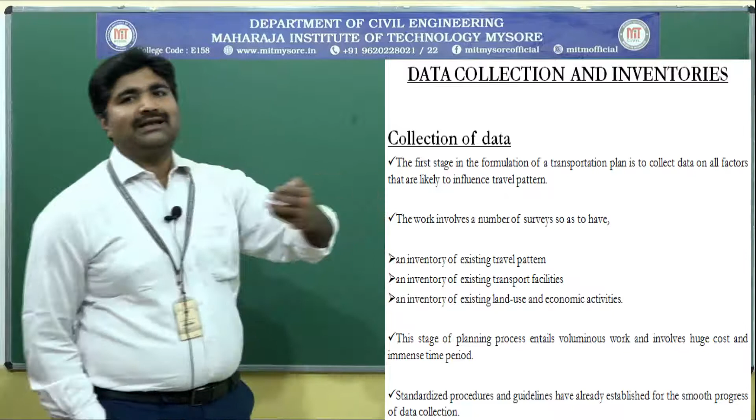What do you mean by data collection? The first stage in the formulation of a transportation plan is to collect data on all the factors likely to influence the travel pattern, the factors which influence movement. The work involves a number of surveys so as to have an existing inventory of existing travel pattern, existing transport facilities, and existing land use and economic activities.

We have to determine the existing travel pattern and movement in the area, whether the purpose of the trip is for work or for school, and what mode they are using, whether personal mode or public transport, and what is the journey time from origin to destination.

When people use private transport, the time taken will be less compared to public transport. We also need data on transport facilities, what facilities exist in the network, whether the road surface is in good condition. If the road surface is not in good condition, the level of service decreases and speed decreases, leading to slow movement of vehicles due to undulations or potholes. We also need to check whether there is a good public transport network.

We need to collect data on what the land use is in that region and what economic activities exist in the study area. Land use may be residential, industrial, commercial, shopping, or recreational. All this data should be collected because it attracts traffic, and depending on this there will be movement and travel pattern.

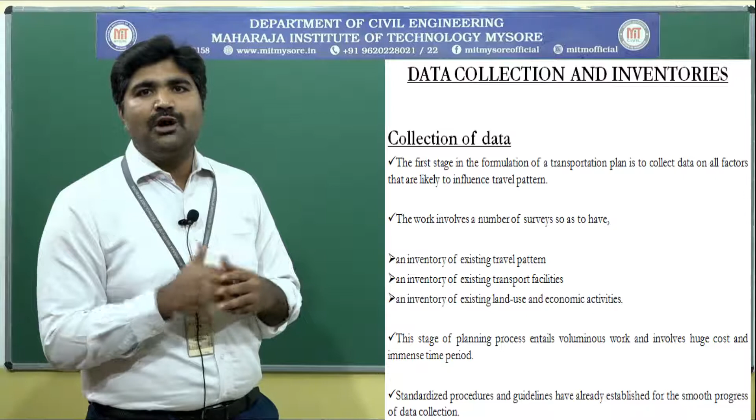Next, organization of surveys and analysis. Before planning, we have to define the study area. To collect all information like travel pattern, land use, economic activities and transport facilities, one needs to know the boundary of the study area or planning area. Hence it is essential to first define the study area.

Transportation planning can be at the national level, regional or state level, or at the urban level, meaning city or town level. For planning at the urban level, the study area should embrace the whole contribution and contain the existing and potential continuous built-up area of the cities, including all areas of the existing built-up area and potential areas.

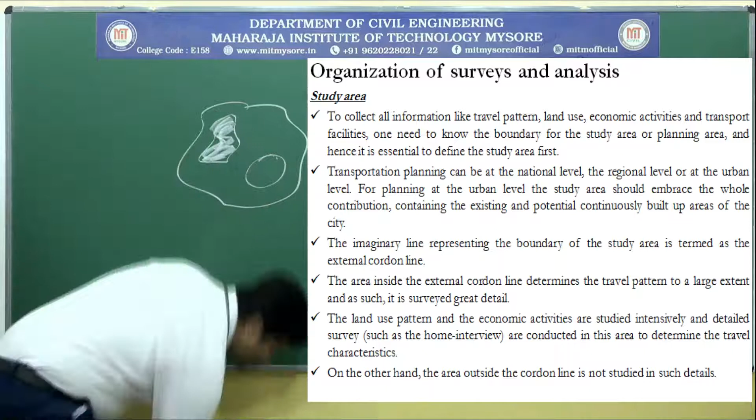Suppose we consider this as the study area, some of this may be developed area and this is vacant space. In future, after providing a good transport network, this vacant area also generates traffic, so we have to consider this area too, since it has potential to generate traffic in future.

This is the study area, bounded by an imaginary line. The imaginary line representing the boundary of the study area is termed the cordon line.

The boundary of the study area is called the cordon line. The area inside the external cordon line determines the travel pattern. I will divide this area into smaller units.

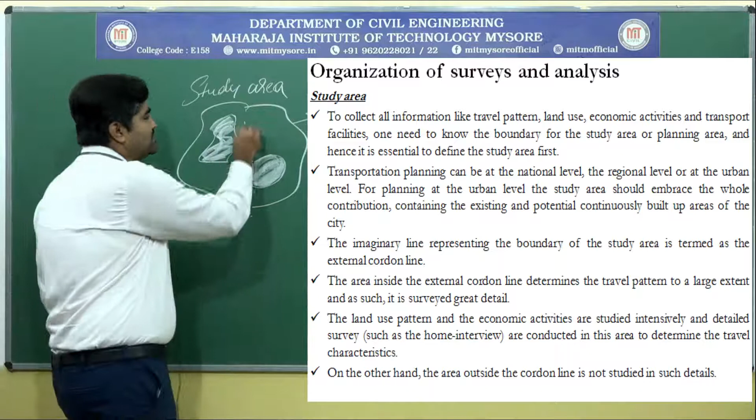These are the next zones. I have divided this study area into zones for the purpose of study.

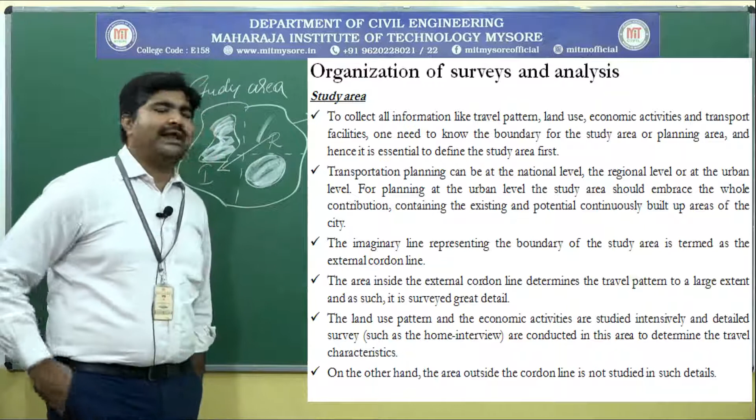Next, the land use pattern and economic activities are studied intensively and detailed surveys are conducted. Detailed surveys are conducted using the home interview survey, to determine the travel pattern and travel characteristics.

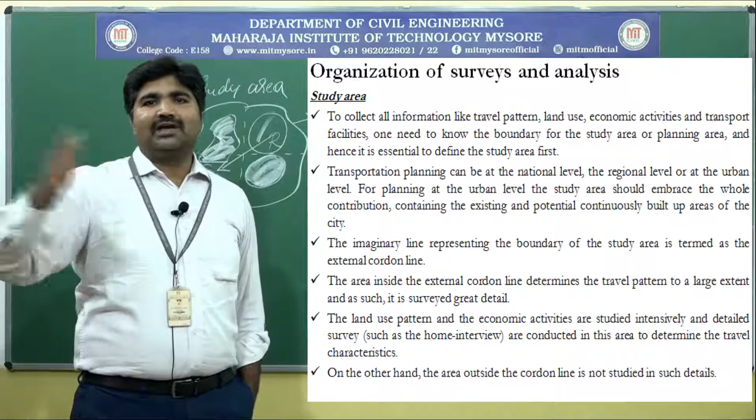Outside the city, coming out from the ring road, we won't bother, that traffic will move into the Mysore-Bangalore road. There will be no congestion, it will be relieved.

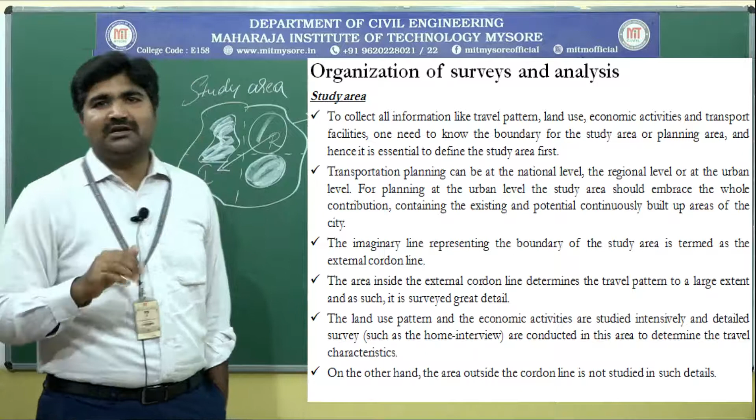Next, selection of cordon line. How to fix this external cordon line, how to fix this boundary line.

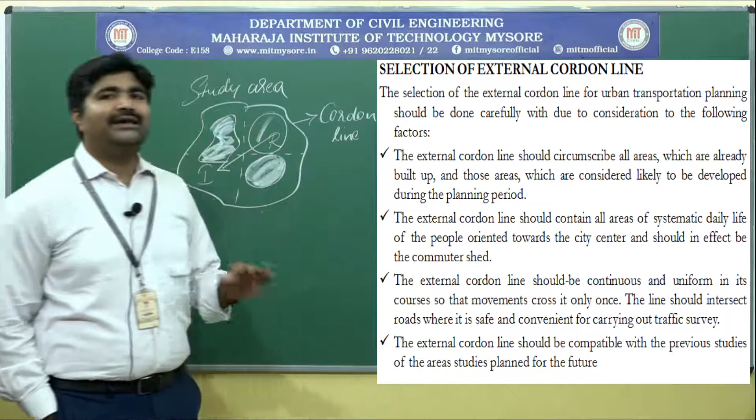The selection of the external cordon line for urban transportation planning should be done carefully with due consideration of the following factors. Considering these factors, we have to fix this boundary line.

First, the external cordon line should circumscribe all the areas which are already built up, and those areas which are considered likely to be developed during the plan period.

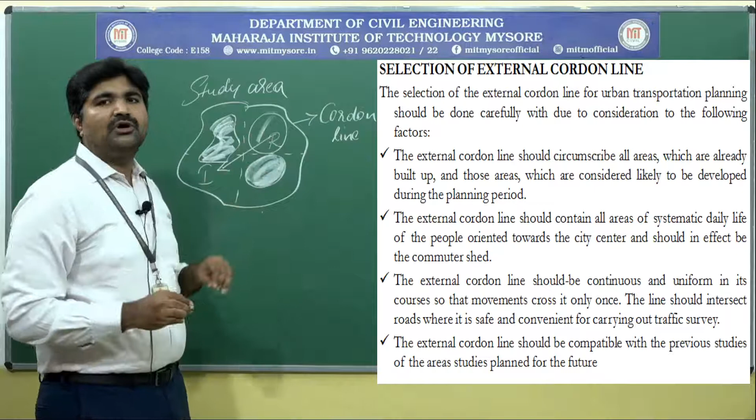Within this study area all the built-up areas should be included, and also those areas which are to be developed in future during the plan period, since transportation planning is for the long range, should also be included within this boundary line.

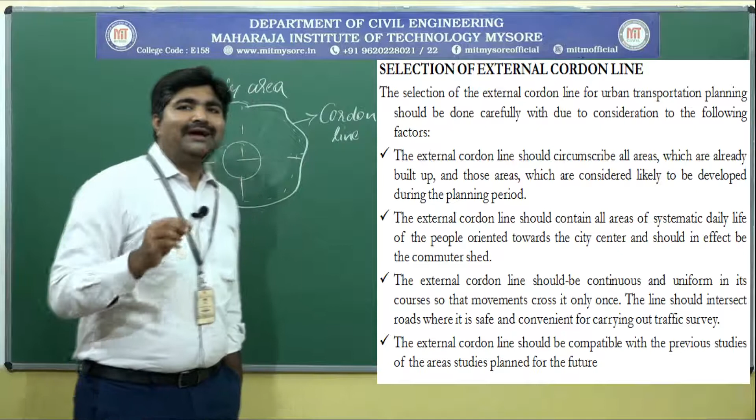The external cordon should be continuous and uniform in its course so that movement crosses only once. The line should intersect the roads where it is safe and convenient for carrying out the survey. The external cordon line should be continuous like this.

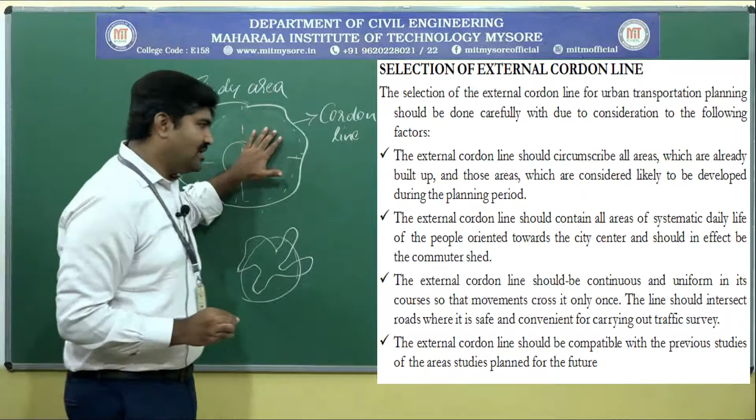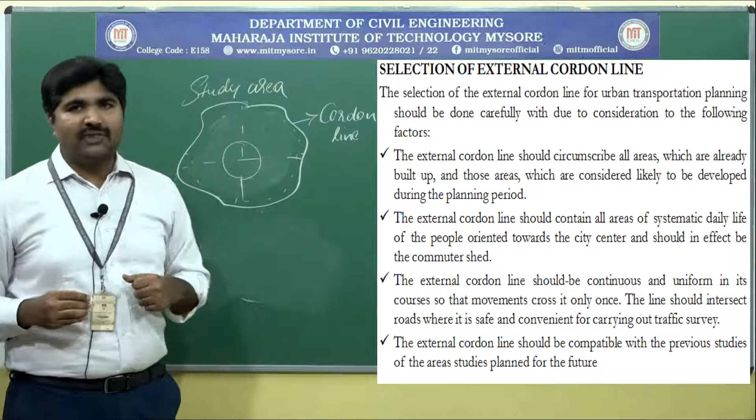Suppose, as I told, we can take a ring road as the boundary for Mysore. As we know, there is a Mysore Bangalore highway, and here it crosses only once.

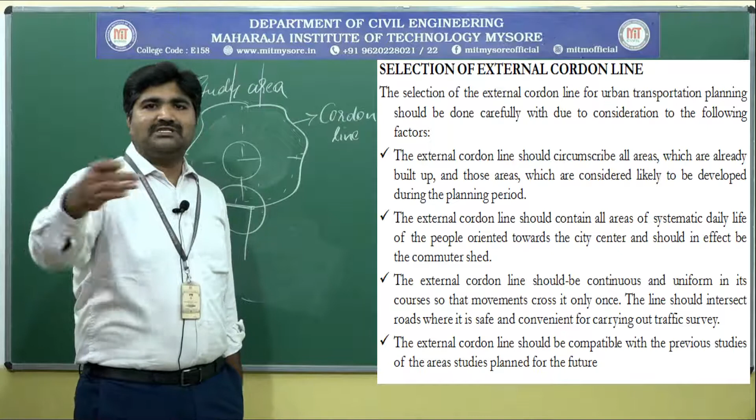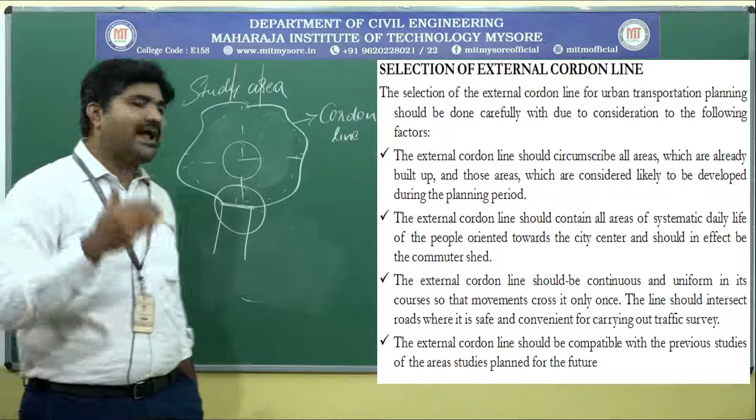Lastly, the external cordon line should be compatible with the previous studies of the area planned for the future. It should be able to withstand with the previous studies also.

Next, zoning. The defined study area is subdivided into zones, meaning the defined study area is subdivided into smaller areas.

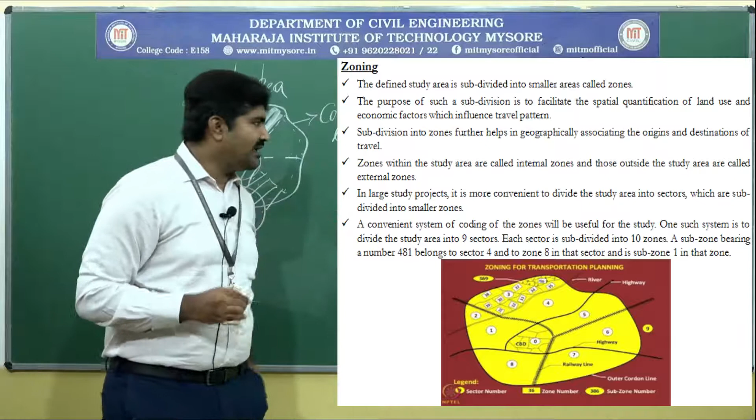In large study projects, when the study area is bigger, it is more convenient to divide the study area into sectors, which are subdivided into smaller zones. A convenient system of coding the zones will be useful for study purposes.

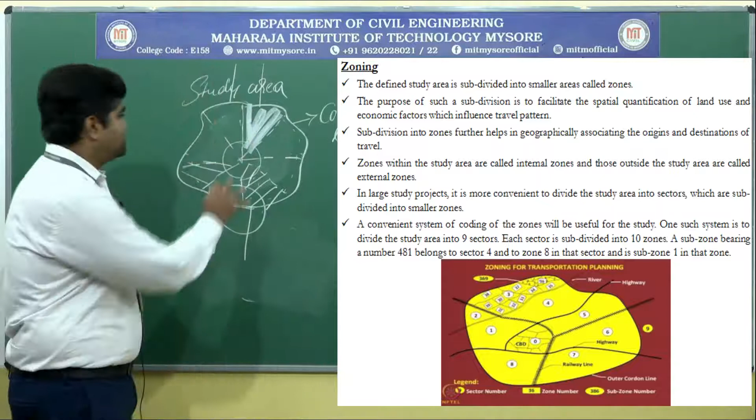One such system is to divide the study area into 9 sectors, numbered 1 to 9. Further, each sector will be divided into 10 zones, numbered 0 to 9. Again, each zone will be further divided into sub-zones.

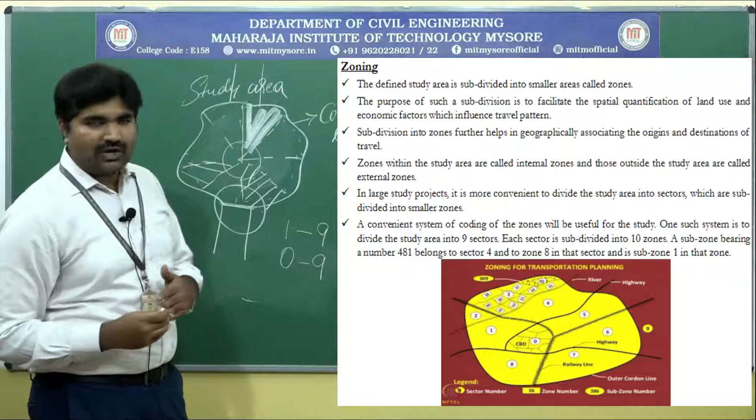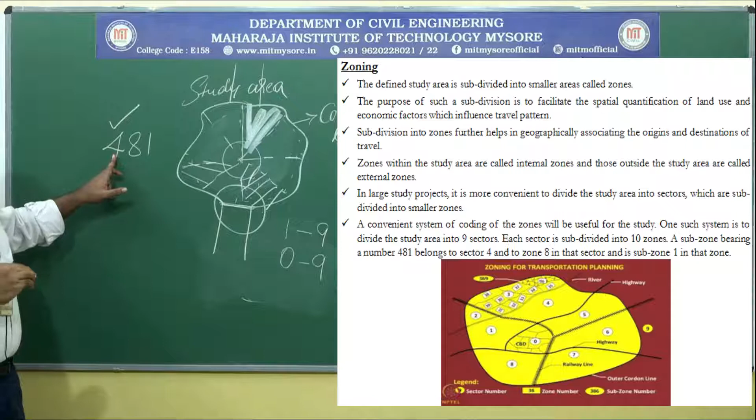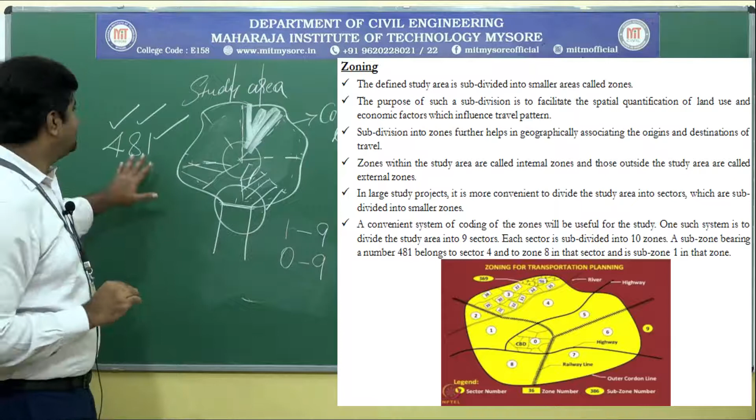For example, take the number 481, which is the identification number given for a sub-zone. Here 4 indicates the sector number, 8 indicates the zone number, and 1 indicates the sub-zone number. So 481 is the identification number given to one sub-zone within sector 4.

The following points are kept in view while dividing the area into zones. First, land use is the most important factor in establishing zones for a transportation survey.

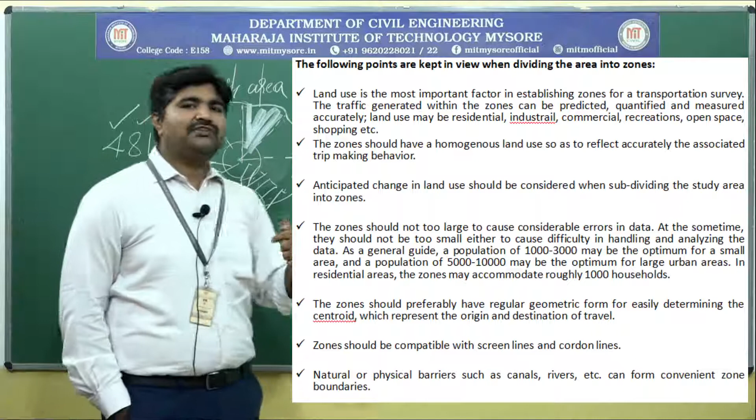As a general guide, a population of 1000 to 3000 may be optimum for smaller areas, whereas a population of 5000 to 10000 may be optimum for larger areas. Generally in residential areas, zones may accommodate roughly around 1000 households.

Next, the zone should preferably be regular in geometric shape. This makes it easy to determine the centroid, so we can easily identify from which corner to which point the traffic is attracted, making it easier to locate the centroid.

The zone should be compatible with the screen line and cordon line.

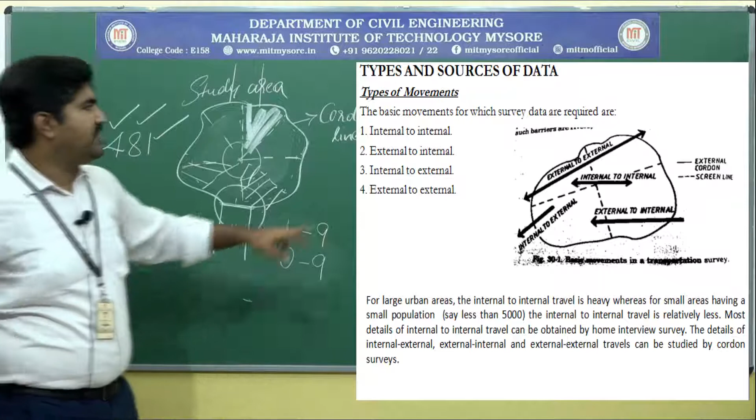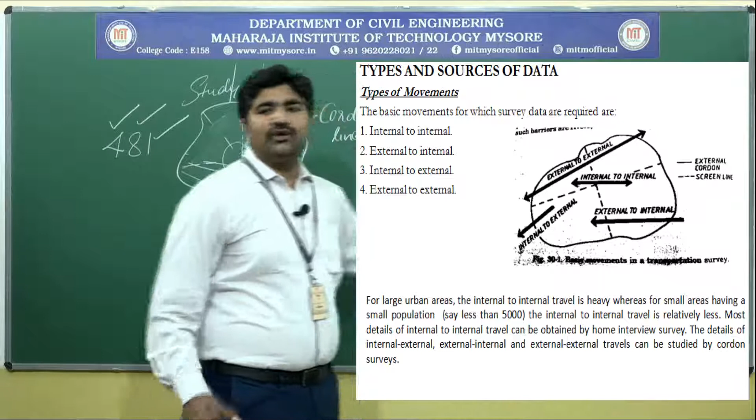See this is the study area. This is the study area. There will be internal to internal traffic. Internal to internal, external to internal, internal to external, external to external. Suppose if you consider this study area, there will be movement - you can observe there is traffic internal to internal. There will be traffic internal to internal.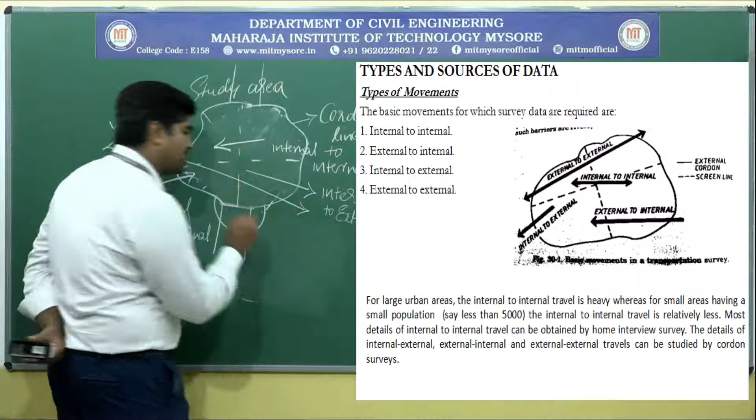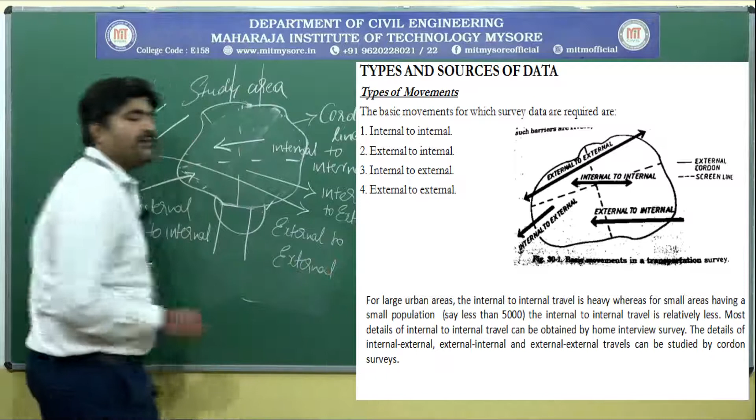Here much importance will be given to study internal to internal traffic because that will be within the study area. Internal to internal movement happens from one zone to another zone, for that we will give more importance. The other three - external to internal, internal to external, or external to external - we won't give much importance because that will be outside the study area.

Again, they come from Bangalore, they may move outside the city area or they return the same day itself, or by evening they move out from the city itself. So we have to give much importance to internal traffic - internal to internal, like Vijayanagar to Devaraj Urs Road, from Devaraj Urs Road to some other residential area. For that we have to give more importance.

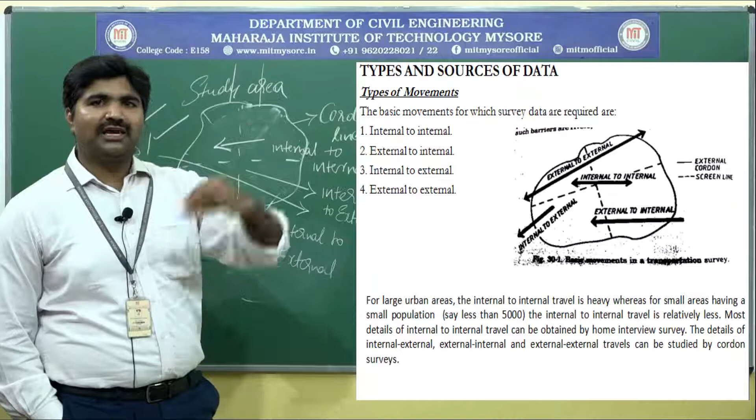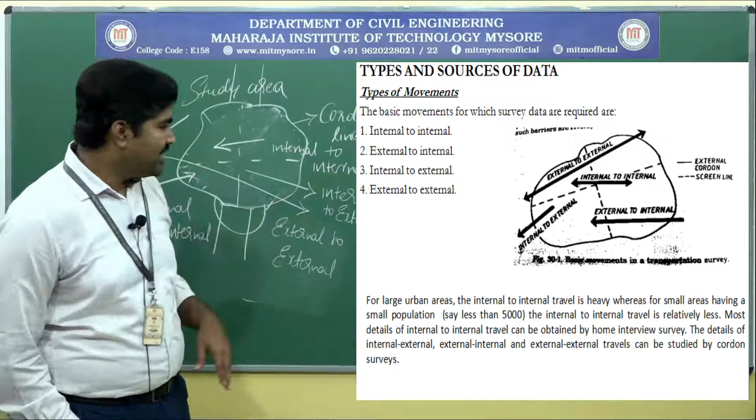See, most details of internal to internal travel can be obtained by home interview survey. By conducting the home interview survey, we can collect the data of internal to internal travelling.

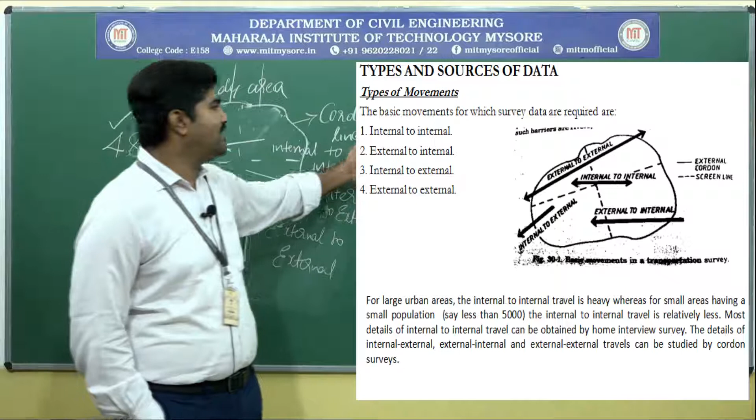Okay, the details of internal to external, external to internal, and external to external travels can be studied by cordon surveys. By conducting the roadside vehicle interview survey, we can determine the data of these three movements - external to internal, internal to external, external to external. This can be determined using the cordon surveys, that is the roadside vehicle interview survey. By conducting that, we can collect the data regarding this travel pattern.